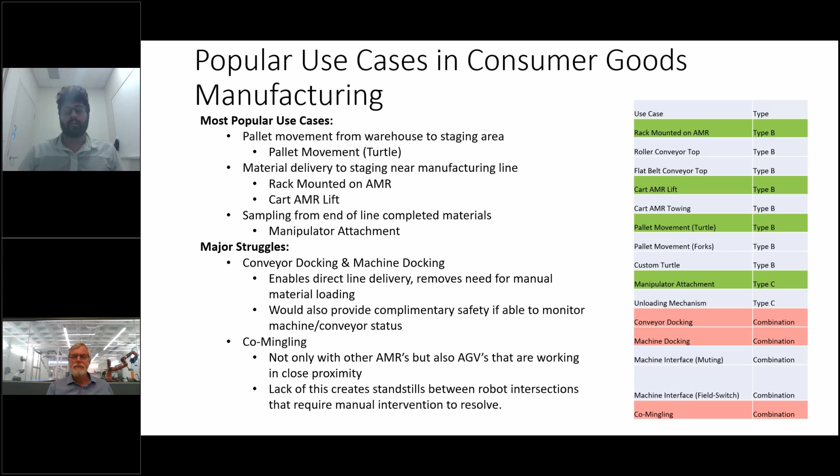But if they were able to see each other and communicate, sharing their travel paths or future travel plans as they're doing trips for delivering material, it'd make it a lot easier for having multiple different AGVs and AMRs working in the same system.

Looking at the financial aspect for a lot of these projects, we have centers that get really excited when they see a vendor come out with an AMR at a very low cost, and they think it'll be super cheap and easy to test. But we've been doing case studies across P&G, and some of those have shown us that when you value out how much the entire project will cost, the actual cost of the robot is only a certain percentage of the total cost of integration.

A lot of times you have to pay for modifying the machine you're going to use the AMR with. You need to pay for the integrator to travel and do the work required to integrate these robots into the system. And sometimes if you need additional devices or sensors, or a separate person to integrate with the WMS or material tracking system, that poses an additional cost.

So the main motivation for making it more affordable would be offering easier and better integration, allowing us to remove some of these extra sectors adding to the overall cost of integrating AMRs into our ecosystem. That would make it easier for a lot more adopters to get these machines and test them during their initial pilot stages.

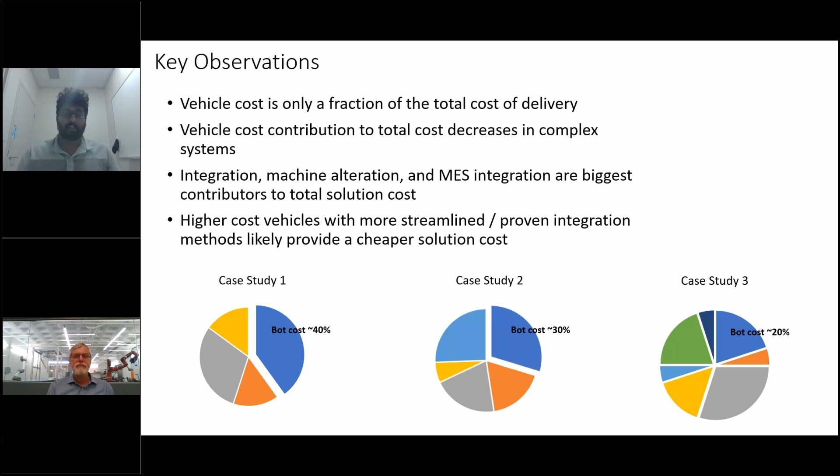We have an early adopters group here at P&G, and we get on a call on a bi-weekly basis to talk about our key struggles and experiences working with different kinds of AMRs and AGVs in our plants. These are the major key points that we've seen be a struggle.

Again, having integration into a WMS or ERP system and being able to track the material and share that information without having to have a separate fleet manager outside of the vendor's own fleet manager, like having a middleman, adds extra cost. So being able to do that directly would be a great help.

Again, shared or mixed fleet management. Looking at AGVs or even other AMRs, a lot of vendors have restrictions on the kind of information that can be shared between other devices. Because of this, it causes more struggles for people trying to have multiple different vendors working in the same area. Like I mentioned earlier, you have to do the same development when integrating a new vendor into the same operation, because I don't think there's really a standard yet for exactly what information needs to be accessible to devices outside of the machine or otherwise in the environment.

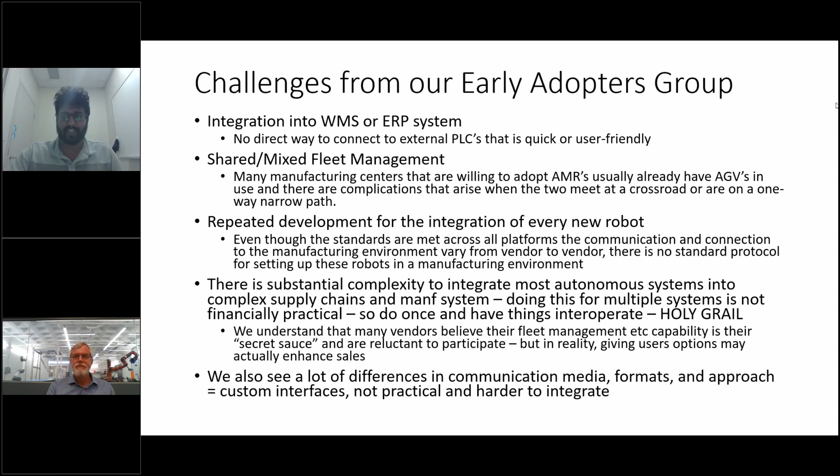Great, Prat. Well, thank you very much for that. We really appreciate that. You've really highlighted some things. First, I love the challenges you outlined. Obviously, we're working on one small part of that, the AMR interoperability part, but it's great to learn a bit more and understand your use cases, which I think is helpful. We have a number of AMR vendors on the line today, so I think that was really valuable. Thank you very much. No problem.

So, thank you. Next up, we have Daniel Theobald. Daniel is, along with being the president of MassRobotics and one of the founders, Daniel has a day job where he is the Chief Innovation Officer for Vecna Robotics, and Vecna supplies AMRs to a number of different customers. We're excited to have him. He's going to go into a little more detail on the history of the standard and what we're attempting to do with this first standard. As I said, there's a lot to do here, and we are not saying this is the end-all, be-all to standards. It's really just a first attempt and a start, but we think it accomplishes a lot, and Daniel's going to explain some more of that. Daniel, I'm not sure we have Daniel's video, so you might be stuck with mine or a screen, but Daniel should be on the line.

Thank you, Tom. Can you hear me? We can. You're all set to go.

Great. Hey, everybody, really appreciate your participation today. This is an exciting event. It's a great milestone for the industry. Really appreciate Prat setting the tone here about the need for this.

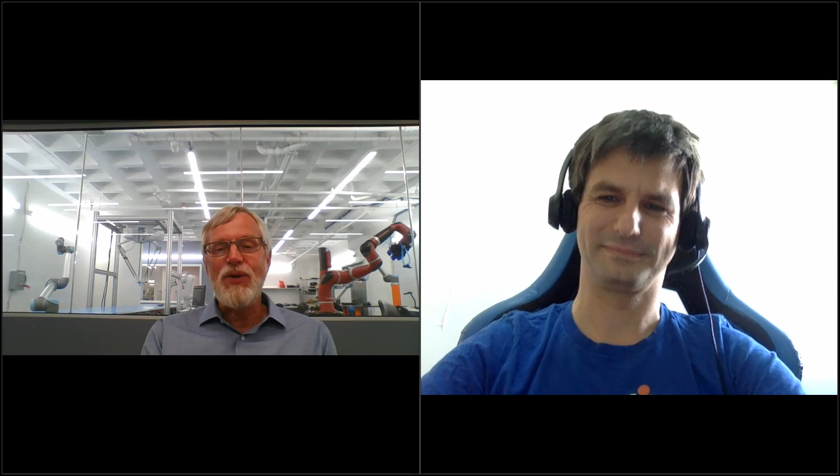Great, thank you, Daniel, appreciate that. One of the things that's critical, obviously, is the use of the standard. We can develop it, but if nobody actually implements it, that shows there's not an interest. We've already had a number of companies reach out and start this work—companies not involved directly in the working group, but interested in what's happening. I'm really excited to have Julian Cerruti, with a brand new company to us but one that's been around, InOrbit, join us. He's done some work with the standard, so he's going to present on that. Julian, thank you very much for joining us, and I'll turn it over to you.

All right, your slides are up. There you go. And audio is up too. So we're good, two for two. It takes some juggling to get everything up.

First of all, thank you very much for the opportunity to be here, and also for all this great work that's been done. As you just said, we're joining the effort right now, but we're very excited about this.

I'm a co-founder and CTO at InOrbit, and today we're going to show how we've been starting to use the standard. But first, there's a really small joke I really need to tell because it only works in this audience: what did the idle AMR tell the busy cobot arm? The answer is, for the most part, we don't know—and this is why we're working on interoperability.

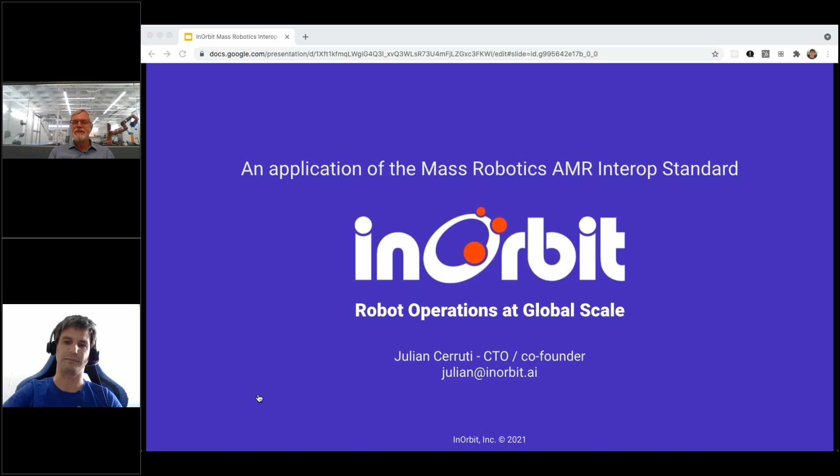All right, first I'm going to go fairly quickly over stuff because I have a lot of things to share, but I'm happy to take questions or go into details later, or offline at any time.

First, for a bit of context, since InOrbit is a little new to the team here: what we do, we have the goal, just like the same team here, to accelerate the adoption of robotics. I really liked Daniel's introduction on why this is all important—we share the same vision. We focus specifically on common and undifferentiated infrastructure, not on the robots themselves. We're trying to help robotics companies and adopters focus on what they do really well. That's really what we do.

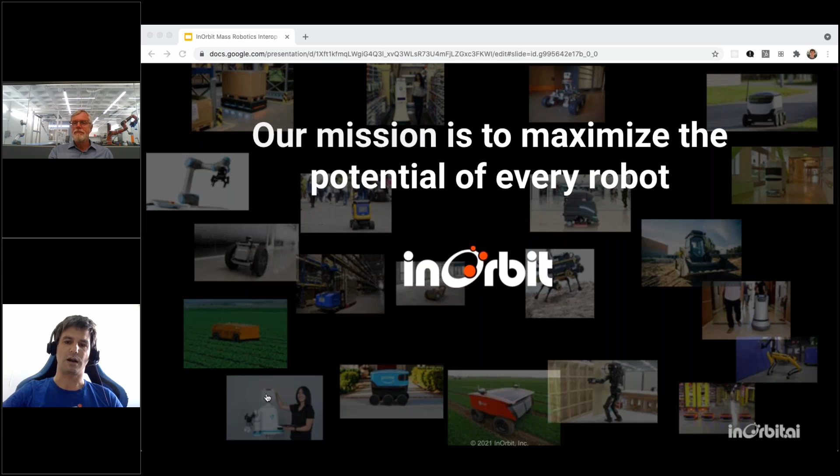We've been around for a while, working with several dozen robotics companies, helping them operate pretty large fleets of several hundred robots in 24/7 operation. Our main product right now is a vendor-neutral RobOps platform that allows connecting heterogeneous fleets of robots. It's specifically focused on a secure and efficient connection between the robots and operators, local and remote, engineers doing analysis, and executives and line-of-business applications. The most typical uses are to reduce time to resolution and also to understand behavior to improve over time.

With the standard, we came into it relatively recently, and we've done two different things I want to share today. One is extending our RobOps platform to support and allow easy connection of compliant AMRs. We've also done a little experimentation, trying to make it even easier to adopt, and to contribute any comments or additions we had.

For the first part, what we did is implement on our RobOps platform a proxy element that implements the compliant protocol that has been published. It was very well documented and very easy to use. Thank you very much.

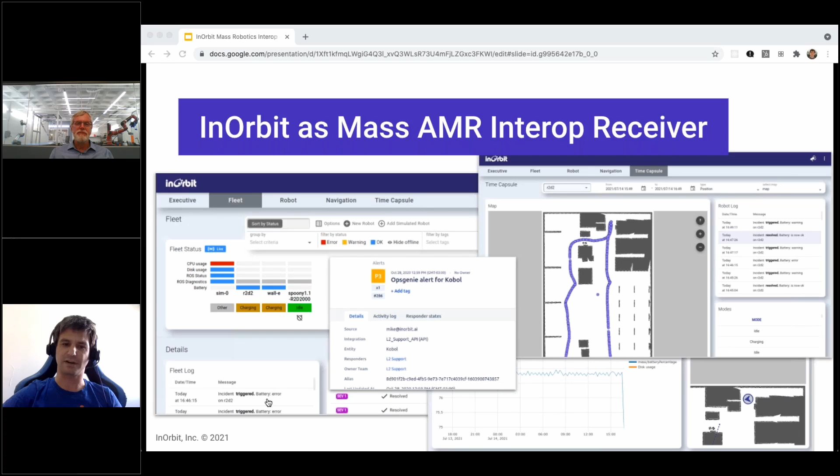On the other side, like many people here, we are well acquainted with the ROS community. So we thought, what if we help advance this by creating additional open source components to make it easier? We developed an open source package, basically a ROS component that allows connecting any ROS robot and converting it into a compliant AMR sender through a configuration file only. It's very easy to use.

You just need to, like any other ROS package, include it as a dependency, get the information from the mapping with all the details that Zach mentioned recently, and that can all be configured through a mapping file. We used typical infrastructure-as-code standards, and it allows mapping from environment variables or from coordinate frames from the local ROS system, or even mapping from different messages to concrete report status. This is open and available, and the handout is available too, so hopefully distribution will make it even easier to have the standard up and running for existing robots.

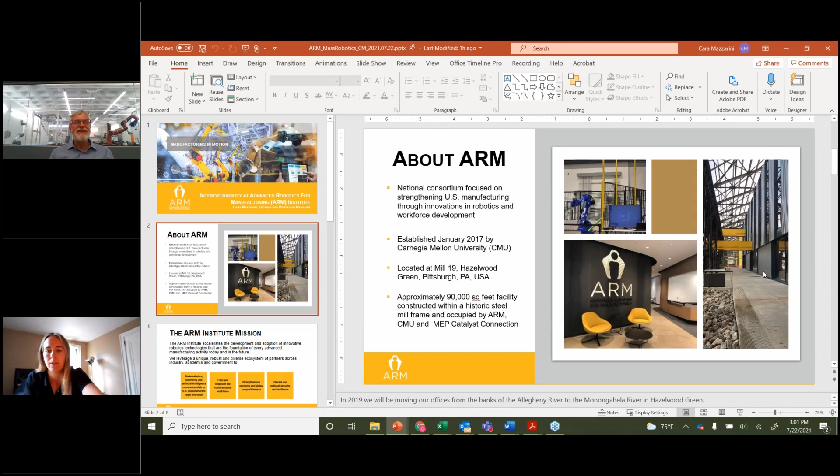So Cara, I have to say before you get started, the screen I see is your main screen with a lot of files, so I don't see the presentation. We can fix that. There you go. I don't know if you want to go into full screen mode. There you go, perfect, thank you. You're all set. All right, no problem.

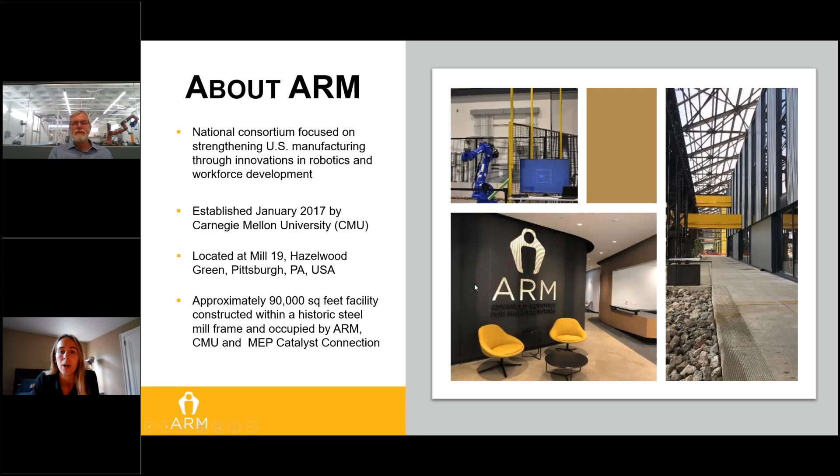So again, ARM Institute — we're a national consortium focused on strengthening U.S. manufacturing. We've been around since 2017, and we're located in Pittsburgh, but we do a lot of work in the Boston and Massachusetts area in general. I've had the pleasure of visiting the MassRobotics facility a couple of years ago, so we're really happy to work with you guys. ARM is focused on accelerating the development and adoption of robotic technologies, specifically for manufacturing applications, and that's one of the reasons why interoperability is so important to us. We're looking at technologies that really have the potential to scale and change the industry, making robotic and automation solutions more accessible to those who need them.

A big part of our mission is our ecosystem. I mentioned we work a lot in the Massachusetts area, but we have members all across the United States. Our member types vary from universities, big companies, startups, to nonprofit organizations. We take a lot of pride in having a consortium full of innovators and people of different experiences as well.

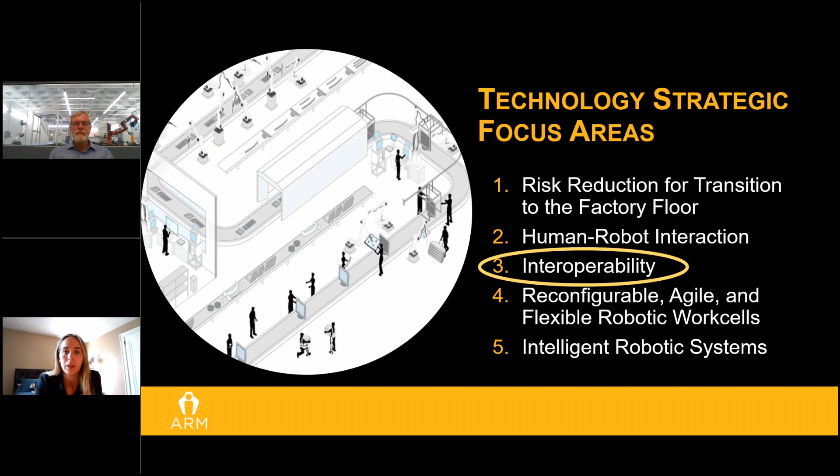So I wanted to highlight 2 of our interoperability projects that have happened in the last couple of years. Both of these were led by Siemens, who is a very active and strong supporting member at ARM, but they were collaborations with several of our other members as well. So the first project, the Seamless Multi-Robot, Multi-Machine Interoperability, focused on what would it look like for our robotic systems to be able to talk to our industrial machines. It was really focused on enabling that Industry 4.0 for much broader communication between a variety of different system types and communication languages.

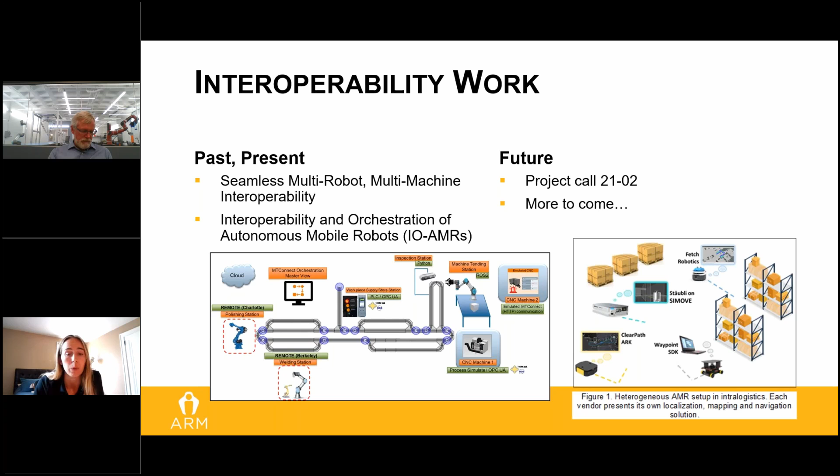So looking into the future, we always have more opportunities for projects. We have a project call that just closed, 2102 - the first numbers always represent the year that we are in. We've received several proposals, 35 in total, and we are in the throes of reviewing them, hoping to see some more interoperability concepts within that group. But I want to encourage you all to follow along, because we'll have more technology project calls this year and in the future. These are opportunities to come to us with new ideas and new ways of solving this problem.

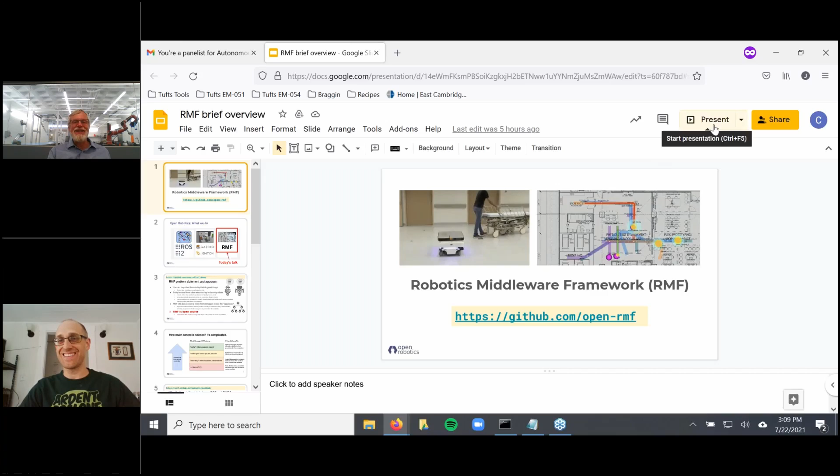Thanks for having me, Tom. Let me show my presentation, let's just make sure you can see it. Oh, and you have videos, I like that already, they're moving. Oh no, we show robots, we should have more videos, everybody, it's good to have videos. All right, you can see my presentation? Yes, yep, fantastic, thank you.

Hello everyone, my name is Chris Lalancette. I'm here from Open Robotics. We used to be the Open Source Robotics Foundation, but we've now rebranded to Open Robotics.

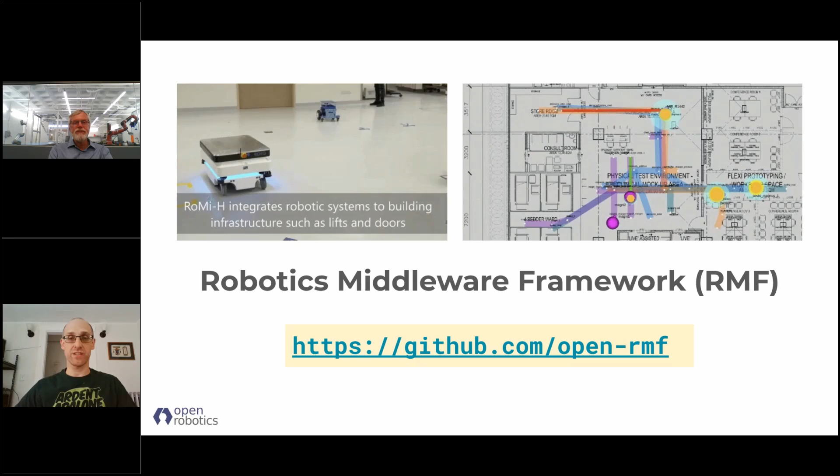So what I'm going to talk to you about for a few minutes here is something very adjacent to AMR, and I'll show you something related to AMR at the end. Open Robotics is responsible for ROS, ROS2. We also do simulation, with Gazebo and Ignition.

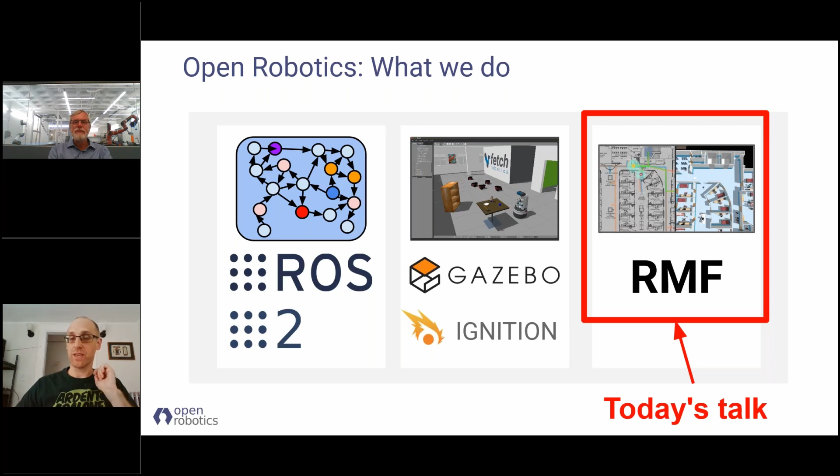But what I'm going to talk to you today about is RMF, which is a project we've been doing in Singapore for the last like 3 years.

What RMF is trying to do here is, you can go out and buy fleets of robots that do things today, right? So deliveries, cleaning robots in a hospital, security patrol, all these sorts of things. And these fleets typically come with managers.

The problem with this is that these fleets often assume that they're the only robots in whatever space they're in. So one common solution is that they'll stop and ask an obstacle to move aside. Now this only works if the obstacle understands what they're talking about, and of course if it's another robot trying to share the space, they're going to be stuck with each other, particularly in very tight areas.

So one solution to this could be to modify the vendor's fleet manager software to interoperate, but vendors are reluctant to do that for two major reasons. One is that they may just not want to enable competitors. But a bigger reason is that if these robots are already deployed in a hospital or a facility, it's often the case that they do not want to go in and make changes to something that already works.

So with that in mind, what RMF is doing is sitting above the existing fleet managers and looking at the whole picture, looking at all of the fleets together. It doesn't directly control robots, but it tries to observe and predict the robot traffic, and then sends requests to each of those managers to try to prevent those conflicts or fix them if they occur.

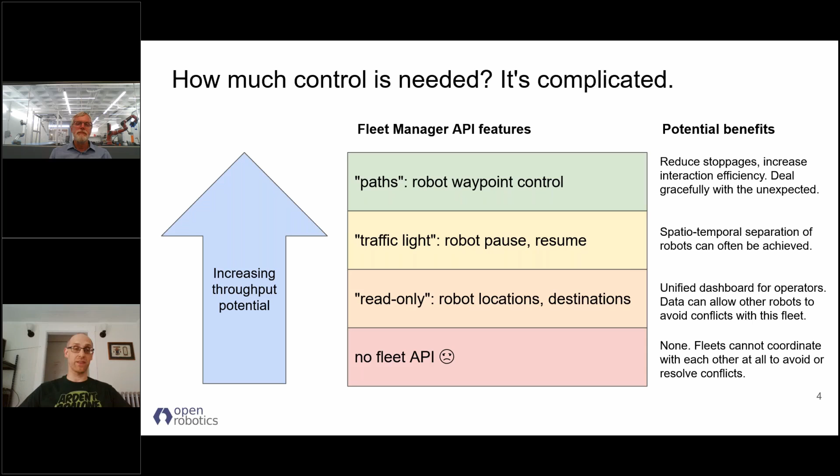And then, of course, the highest level of control is where we can have a lot of control over the robots, their paths they're going to take, their waypoints, that sort of thing. And with that, we can do things like make robots take different equivalent paths, or even temporarily move out of the way of another robot. In RMF, we have examples of all 3 of these levels implemented, so we know this system at least works in some sense.

As lots of people have talked about, we're Open Robotics, and a lot of what we do is ROS. So one big question here is, how does ROS interoperate with RMF? RMF is built on ROS 2, and all the internal components of RMF use ROS 2. Most of these packages are available in ROS 2 Galactic, our latest release. We're not quite there, but we're on our way to getting most of that released.

That said, if you want to do multi-robot systems using ROS, RMF is not the only way. That just happens to be the way we're doing it now. If you want to make a multi-robot system by having ROS talk directly, or using other protocols, that's how other people are doing it. So that's just something to keep in mind as well.

Those familiar with ROS 2 know it uses DDS as its communication mechanism. RMF chose not to use DDS all the way to the edge, for two main reasons. One, DDS has some scaling issues, particularly over wireless or intermittent networks. The other reason is that RMF has to talk to vendor fleet managers, which have their own proprietary or custom APIs and protocols. So RMF has to be able to talk all the way down to the edge. We only use DDS in the middle part of RMF, and the rest are connectors that connect into the fleet APIs.

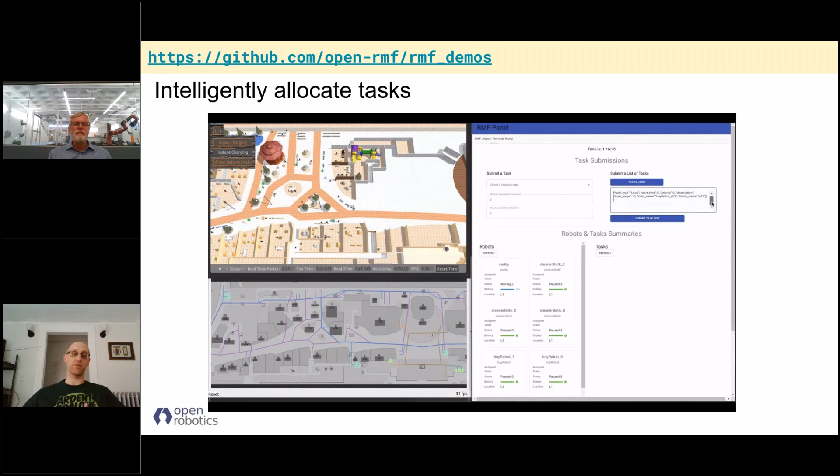Another thing that RMF contains is tasks. You can give tasks to RMF as opposed to the individual fleets, and RMF will choose the appropriate fleet—the one that's most unloaded, or has robots in the best spot, and also choose a fleet where there won't be as many conflicts.

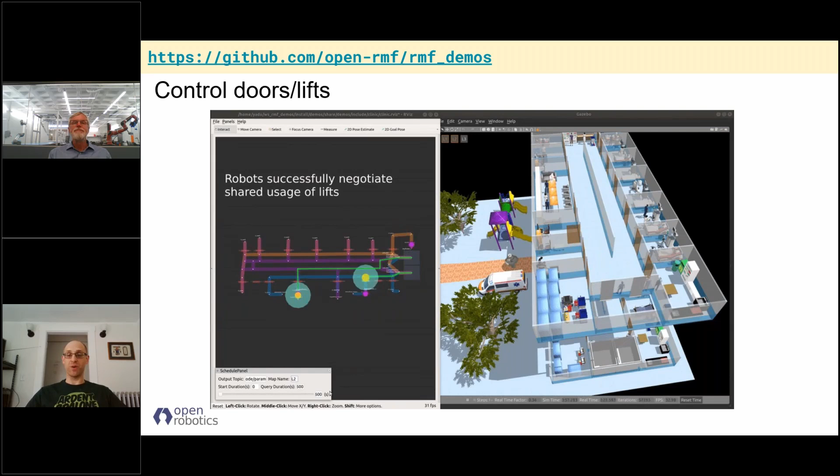Another thing RMF can do is control doors and lifts, so they can be shared by different robots, which is actually shockingly a very difficult problem currently without RMF.

The last thing I want to mention before I run out of time is we've recently done some prototype work having RMF talk to the MassRobotics AMR interop server. We took RMF and made it so RMF could deliver goals to a MassRobotics AMR interop server. We could also do the reverse, getting the information Jason and everybody else talked about earlier, but we haven't implemented that yet in this prototype.

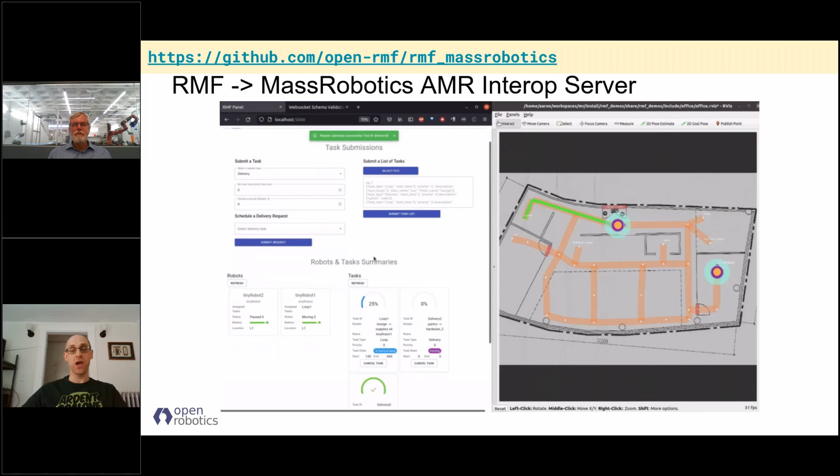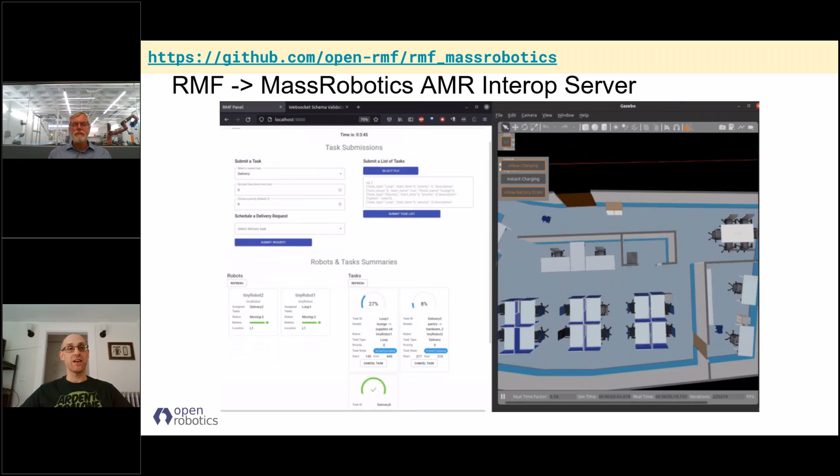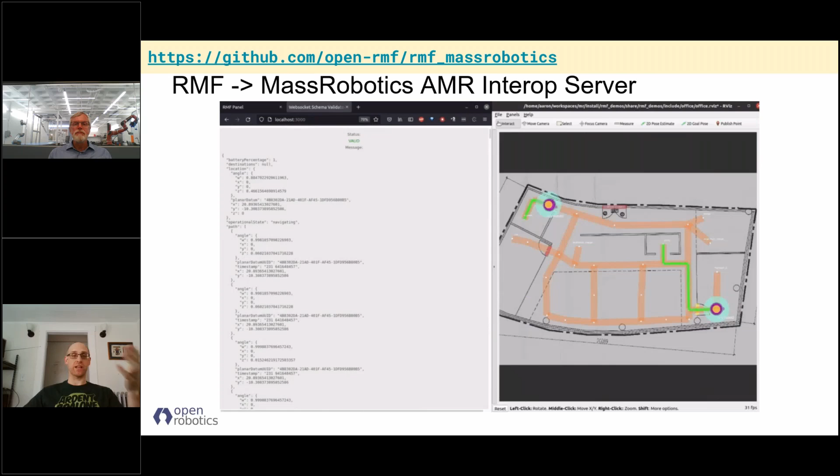The next thing shows what we're doing. We have task submission, as I showed, that RMF can do. We submit a task to this robot on the right-hand side, which is running an AMR interop server, and you can see in the simulation the robot has started its task. On the left side, the tab will switch—this shows the JSON message. Anybody who's looked at AMR interop in detail will recognize those JSON messages, and that's what we sent down to the robot to start its task.

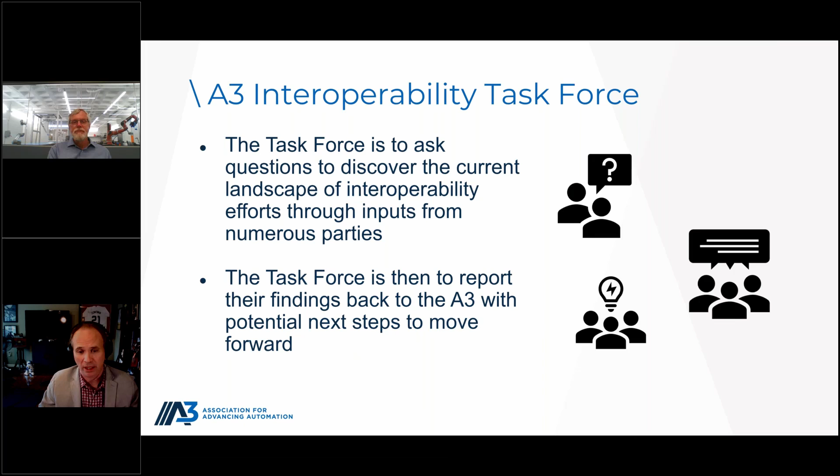Beyond fleet management, we're looking at several potential areas of discussion. Some have already been touched on here: robot-to-robot communication, data standardization from robot to server or to cloud, and also battery charging infrastructure, which has already been mentioned a little bit during this webinar today. But again, our goal now is to landscape these efforts. So if you're aware of any efforts that are out there, especially ones that weren't touched on in this webinar today, please reach out to us and let us know.

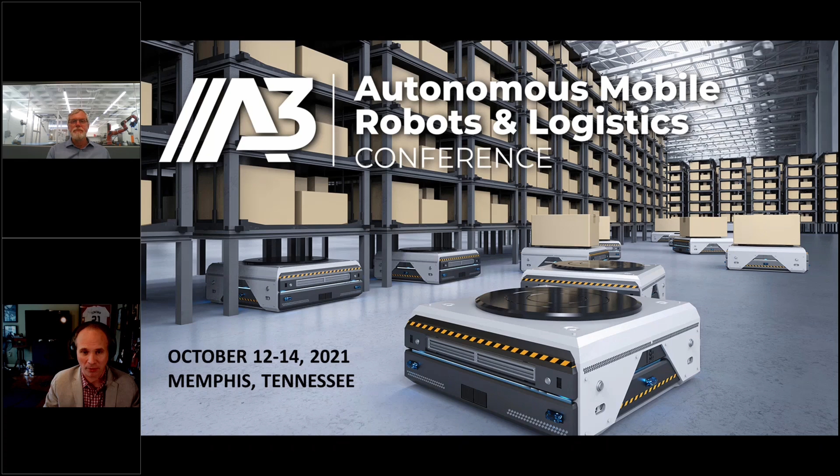Also, though, Tom mentioned the interoperability test between MassRobotics, the MassRobotics protocol, and the ARM Institute that's coming up later this year in the FedEx facility in Memphis. We're hoping that will align with our Autonomous Mobile Robot Conference, which is October 12th through 14th. I talked to FedEx yesterday, and all is looking good at this point. They were so excited, in fact, that during this call even, they sent me this photo of a robot in Memphis. So we would love for all of you to join us down there, both for the conference, but also potentially for the interoperability test.

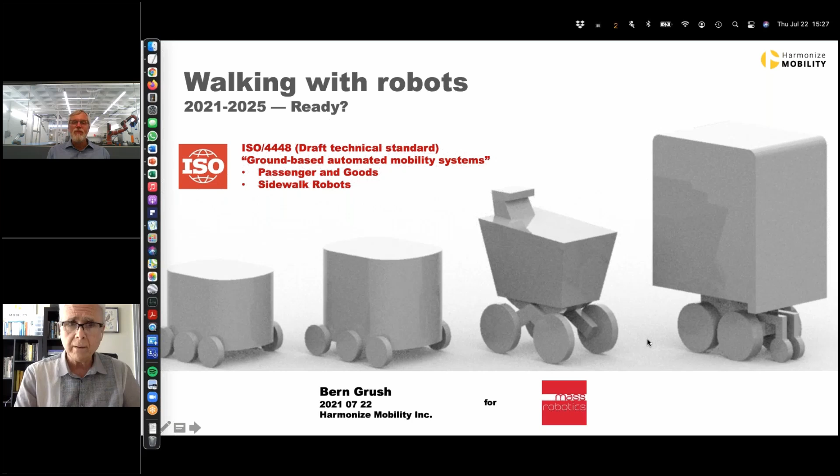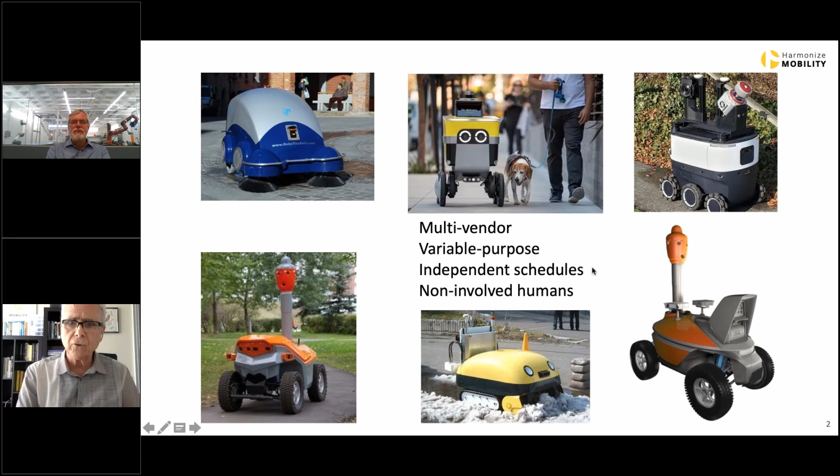I'm going to be talking about systems above the level we're talking about now. I'm assuming, for better or worse, that these robots out here on the sidewalk are doing many things. They may be sweeping, surveilling, or cleaning. This one on the bottom right is checking license plates for overdue parking. So all of these kinds of robots are out competing for space, with humans, other machines, and so on.

Right now, the current state of sidewalk or pathway robots is that they're telemonitored and teleoperated. One person may be watching one, two, or maybe three. We'd like to get to a point where one person can watch 20 or 30 of them and just tune in when required, but that's a little bit in the future.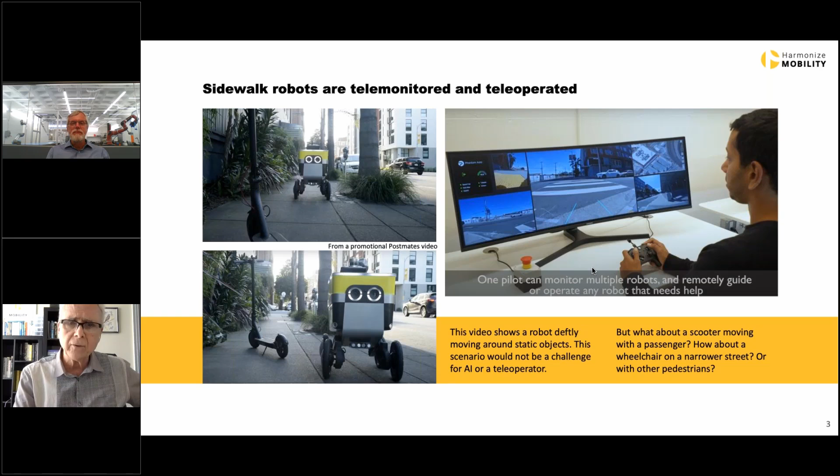So this standard I'm going to be talking about is for this world of robots I've been showing you. The problem is, again, multi-vendor like your problem, variable purpose like your problem, even more purposes—I just showed you some examples. They all have independent schedules. The vendor moving snow is independent of the vendor moving a package. And even the ones moving packages, like FedEx and UPS, they just have independent schedules. They're going about their business.

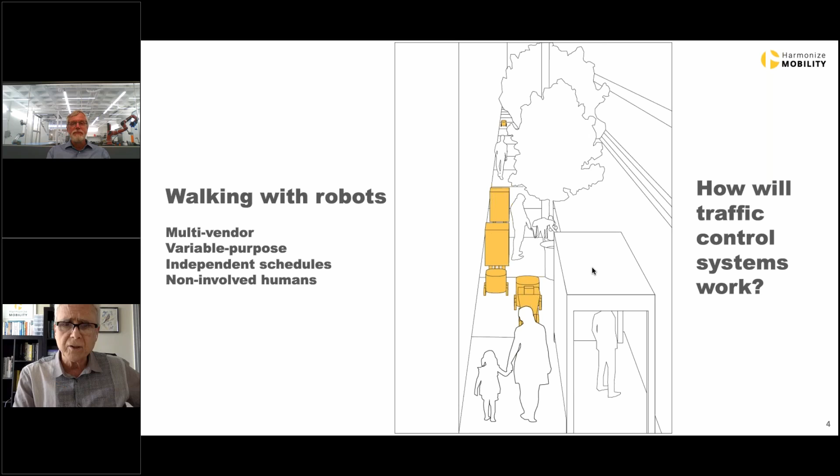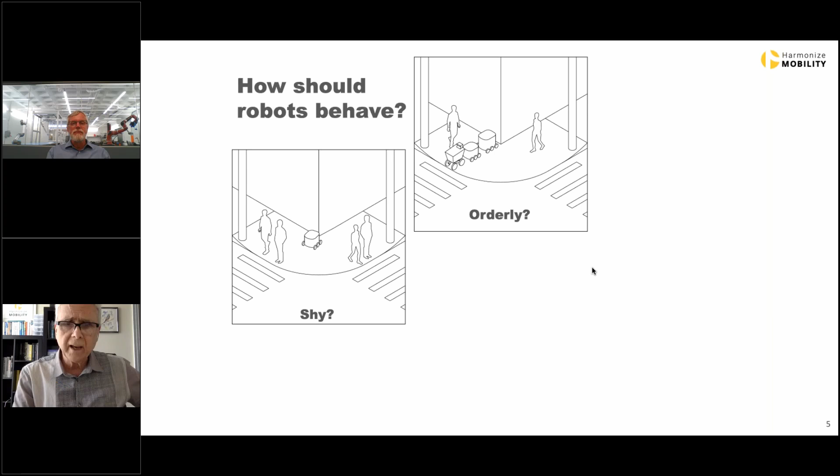How will the traffic control work in these circumstances? How should the robots behave? Should they stay back and be shy at the intersection? Should they line up—though in this silly case that would block pedestrian traffic? Should they just cluster around and do their best, risking congestion, or should they be competitive in some way?

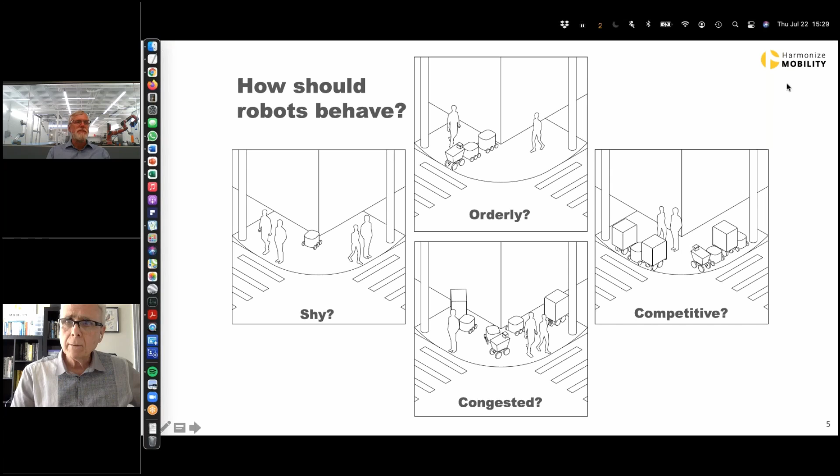There's a lot of noise coming from somewhere. Yeah, sorry, that's from my side.

I mentioned already non-involved humans. A non-involved human is someone out in that space who has nothing to do with, isn't trained to work with, and isn't collaborating with the robots, unlike in a warehouse or factory. These are just other people doing other things, completely uninvolved. And also, we're being mixed with automated and non-automated vehicles, as in the case of robotaxis and so forth.

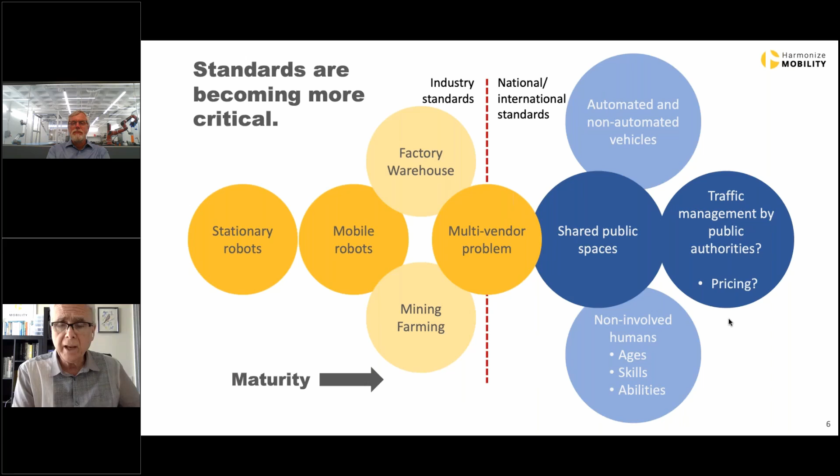So we're moving into a kind of international standard. I'm going to talk to you about an ISO standard. And this traffic is actually going to somehow be influenced by, managed by, controlled or governed by public authorities in some way. They may even be entering the issue of pricing—pricing the use of the sidewalk, for example.

The standard itself covers all the kinds of things you've already been talking about—the data, the procedures, the protocol. It has to deal with all levels of automation, whether the vehicle is fully teleoperated, partially teleoperated, or level 3 or level 4 automation. The standard has to cope with all of that, with machines on the sidewalk, on the pathway, or in the roadway. And a robotaxi is a robot in the road for passengers, and so forth.

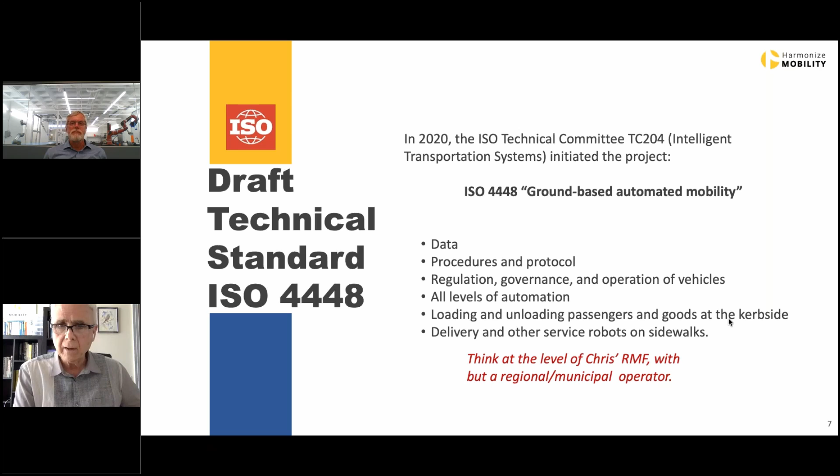I want you to think about what we just heard from Chris. I just added this line when Chris talked about RMF—we're up at that level, except that the operator, or the governor of this, would be at the regional or municipal level, not just at the factory floor level, for instance.

There are 11 parts planned so far. I was in a conversation today in which another part probably needs to be added. Where you see the S, it means it applies to the sidewalk.

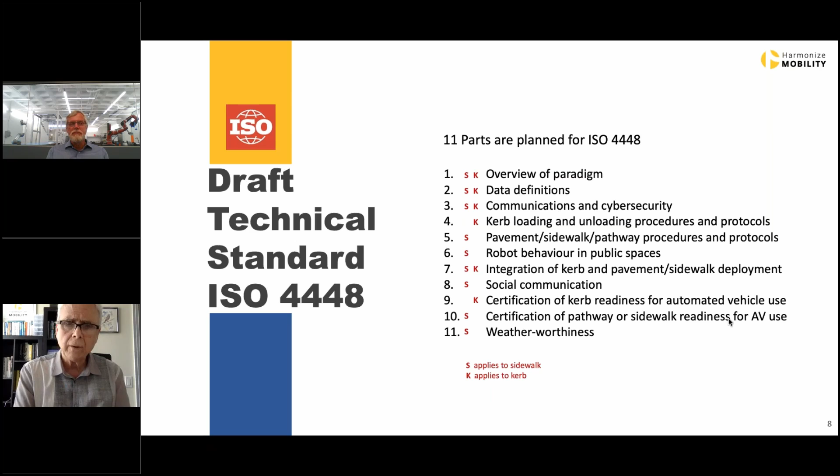Where you see a K, it applies to the curb side - in other words, the parking side, the robotaxi side of the curb. If it's only S, it only applies on the sidewalk, and if it's only K, it only applies at the curb side. Otherwise, if you see both letters, it applies to both, because there will be cases where robots might be loaded into a truck, that truck parks somewhere, and the robots are let out of that vehicle to do the delivery. This is the kind of thing a FedEx or UPS might do in the future - they might bring 3 or 4 robots to a location, park the vehicle, and those robots would do their job and so forth.

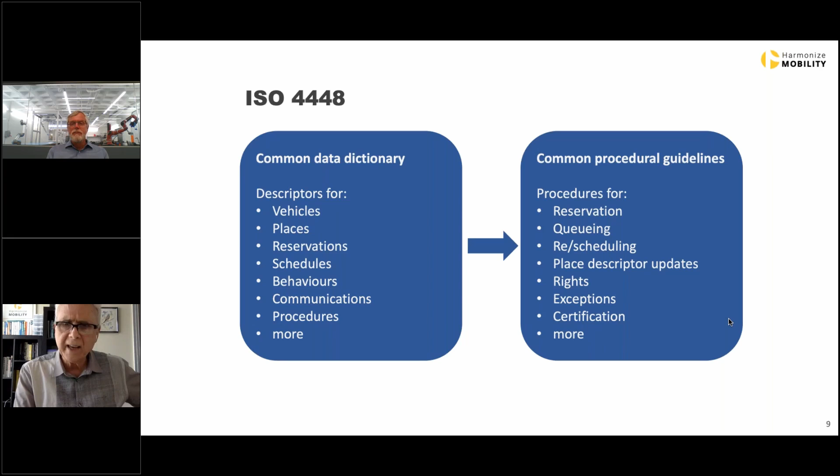So just to cut this short, I'm working now with representatives of 11 different cities. Some of these are in Europe, some in the States, a couple in Canada - Orlando, Pittsburgh, Washington D.C., and Boston are included. Lisbon, Budapest, and London, England are included, and so on. Budapest, of course, is not in London, as you all know - I didn't say that very well.

I'm looking to work with a dozen vendors, I'm working with 7 now, and I'll put a call out here: I have no logistics vendor, no logistics operators - a very, very critical missing element of this. If anybody knows any logistics operator, exactly what I'm thinking of - some of you may be on the call - I'd like to talk to you. We meet 3 times a year in a virtual roundtable, look at the work that's done, and critique it. I do welcome observers who are not sponsors - you're welcome to join, watch, and contribute externally as well. So that's it, thank you.

That's my company, Harmonize Mobility in the Center. I'm doing this work under the aegis of ISO, and I'm thanking MassRobotics very much for the privilege of talking here this morning. I don't know if there's time for any questions - I think there is not, but thank you very much.

Ern, thank you, and appreciate you coming on and sharing a little bit about what you're doing. It's truly fascinating to think of the future volume of robots that could potentially be on the sidewalks, and you're right, managing that will be an interesting proposition. So I'm glad you're working on it, and ours is limited.